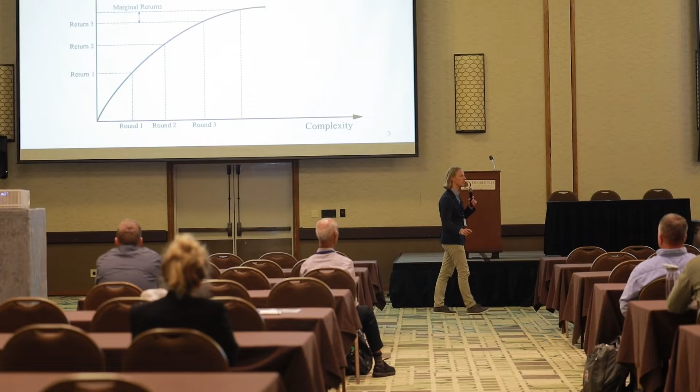Because I'm an engineer, that's just the way it works. And this one is a figure. I'll show you the figure from a book that I read more than 10 years ago now. It was written in 1988 called The Collapse of Complex Societies by Joseph Tainter. He used a very well-known economics model called diminishing marginal returns, and he associated that with civilization.

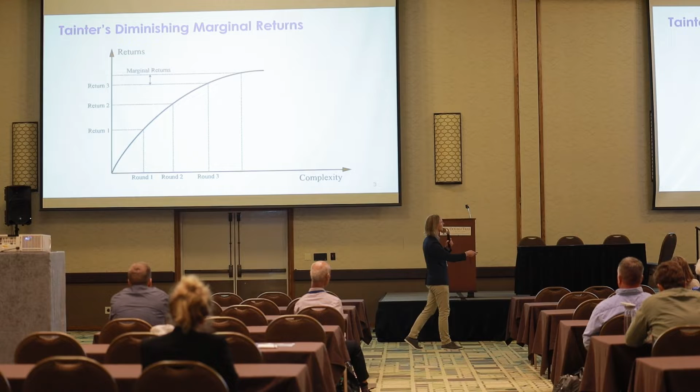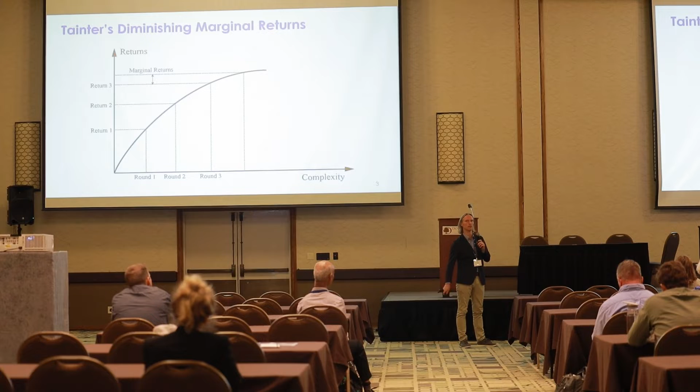So let's see if, all right, perfect. So that laser pointer works. So I want to explain to you what that is. It says complexity and returns. Don't really read complexity, I just really want you to think in terms of infrastructure. So what we're going to do here is on the x-axis, we're going to add infrastructure. And on the y-axis, we're going to look at the benefits from that infrastructure.

So for example, let's say you're in Omaha or you're in Lincoln, you're the first settlers there, and you need to get your water from somewhere. Where are you going to get it from? If you're in Omaha, for example, it might be some well field, or it might be from the Missouri River, and then you'll add a lot of infrastructure right here, and you'll get tons of benefits from it, right? You're going to go first with the lowest cost, most accessible option, the easiest, so you're going to get tons of benefits from it.

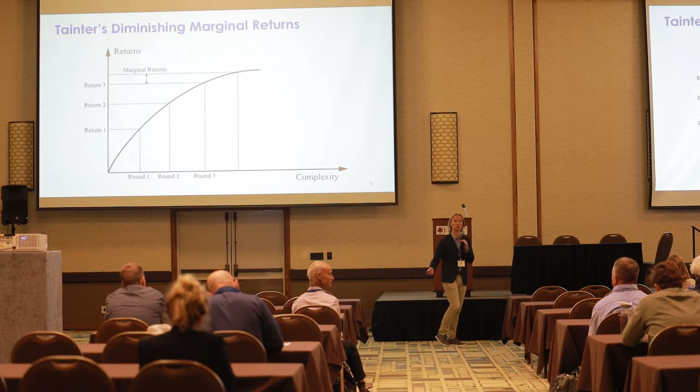And then your city grows, and that one source is not enough anymore, so you need to build more, kind of what's happening exactly with Lincoln. And so you're going to have to add more things, and maybe you're going to have to double your system. It's inevitably going to have to become more complex, but the returns are going to have to be smaller because the best option, you already tapped it, so you're going to have to go to the second best option. And if it grows again, you have to add way more, but the benefits, even for every gallon of water that you're using, are getting smaller.

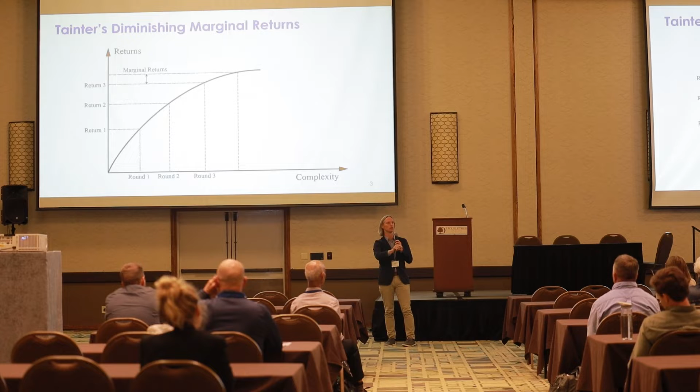If you keep doing that, they get smaller and smaller and smaller. So the fact that the benefits get smaller, those added benefits, these are marginal returns, the new returns that we get. And the fact that they're getting smaller and smaller means that they're diminishing, so diminishing marginal returns. My argument is that for a lot of the infrastructure right now, we're right there, at the end. And there's two options: either you change, you adapt, you evolve, you think differently, or you collapse.

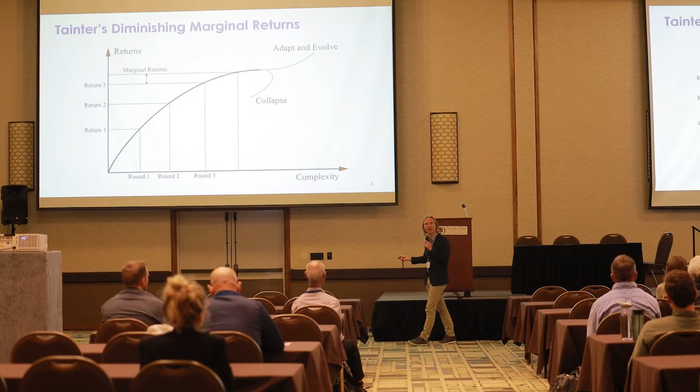And that's happened both in history of mankind. The Roman Empire is a great example of collapse. The Maya civilization is a great example of collapse. I want to come back. And here, adapt and evolve. Even the Industrial Revolution is a great example of adapt and evolve. Cities got bigger, we had access to coal.

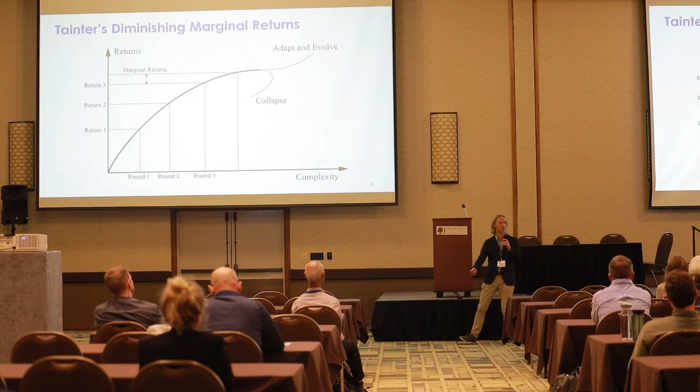We had access to fossil fuels, and we loved it. Now we understand that it was not necessarily the best thing in the world, and maybe we have to stop using a lot of that coal and fossil fuel.

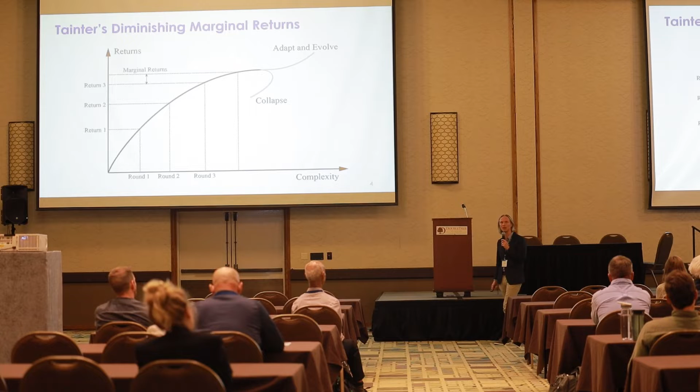That industrial revolution got us to go up, and now we're here again. So it's time to think differently. One of the ways I like to talk about those marginal returns is efficiency. Whenever we're trying to be more efficient, we're trying to do the same thing a bit better. That's okay when your system is not too big, that's okay at the very beginning.

A good example I have for you is the road system. At first you put a few roads, it's enough, it's good. Then you have more and more people coming in, and you start to think congestion is not very fluid. What do you do? You try to make the system more efficient. You put traffic signals, and then you have traffic signals everywhere, and it's a lot more efficient. And then you're like in LA, where you have as many roads as you can build, you have one of the best traffic signal systems in the world, and you have gridlock.

So what's the solution? More roads? Nah. Better traffic system? Nah. You have to change the way you think about things. It's not about being more efficient, it's about being more effective. Completely changing the way you do things, trying to be a lot more innovative. And that's where we are with a lot of infrastructure systems right now.

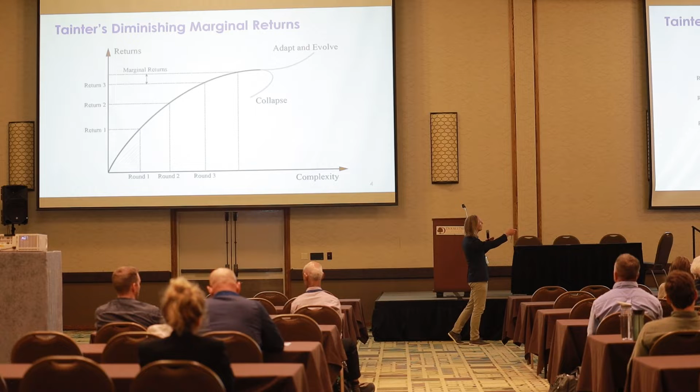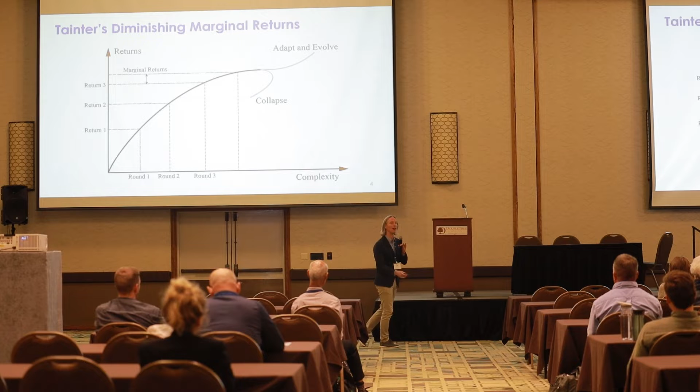I'll point to one, at least in water, and see if you agree with me. It's one where I think the water realm is really behind other infrastructure systems. So we'll try to think about that together.

What we'll try to do today is really also to think differently. There's that quote from Einstein that I love: we can't solve our problems with the same thinking we used when we created them. As an engineer, I know that we've developed a lot of methods in the 1960s and 70s, and a lot of them kind of drove us to the problems that we have now. So they solved the problem at the time, and they were amazing.

But if we keep using the same concepts now, we're not going to solve anything because they're the ones that drove us there. A good example, again in transportation, is traffic flow theory. It was developed starting in the 1930s and 40s, and it was amazing, it's great. We have all those roads now, but if you use traffic flow theory to solve your problems, it's not going to work because that's what drove us there.

Another good example I have for you is I remember Mark Zuckerberg, the CEO of Facebook, testifying in front of Congress and talking about Facebook and the problem with a lot of the algorithms, all the machine learning that feeds you advertising or posts on Facebook, and how those are reinforced by what you see, so you kind of get into that mindset, into that rabbit hole.

And they were saying, well, maybe what we can do is have new machine learning to judge the current machine learning. It's like, that doesn't make sense. Those were great at the beginning, they got you to the system that you have, but you can't solve your problem by using the same thing that created your problem. Right? So we'll try to think about that.

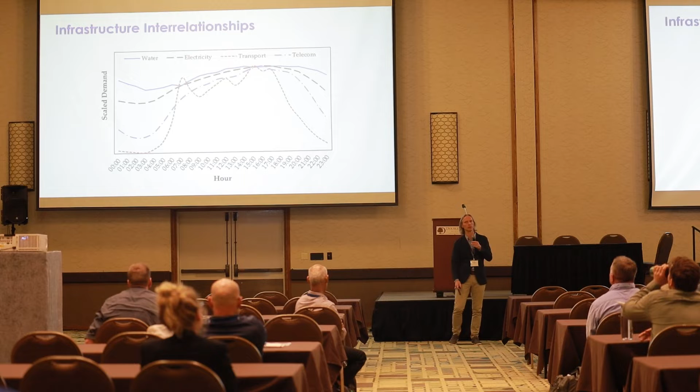I mean, this is all interrelated, all interrelated. I have a paper that came out not too long ago where we use transportation volume, traffic volume to predict electricity consumption. We did that with electricity because we had data, but I swear the same result would come in with water if we had smart meter data from water, right? It's all interrelated. So trying to think more about those interrelations, and we'll talk a little bit more also about multifunctional infrastructure.

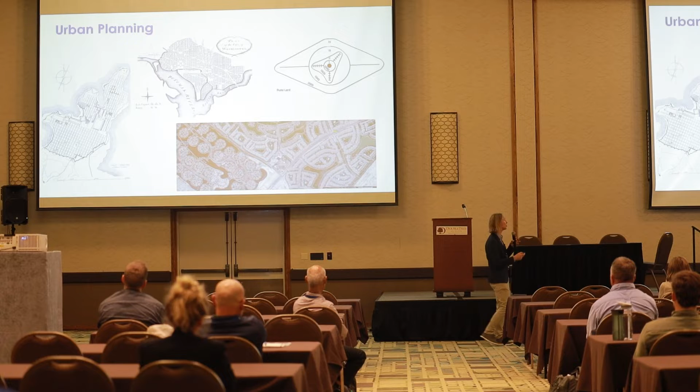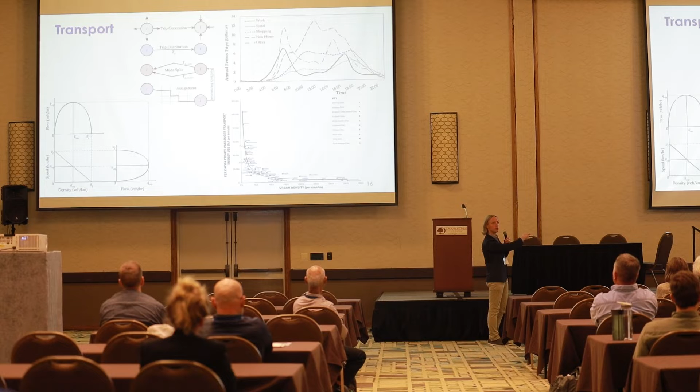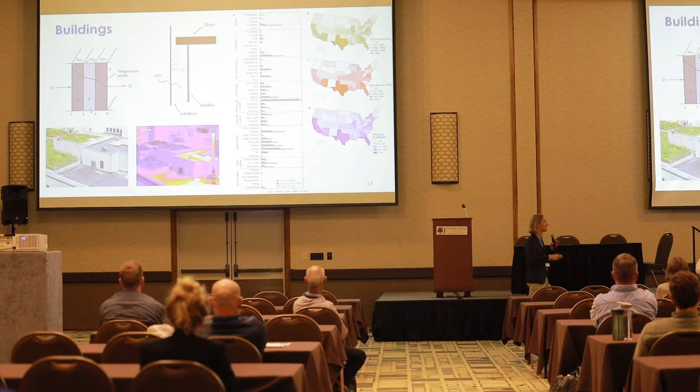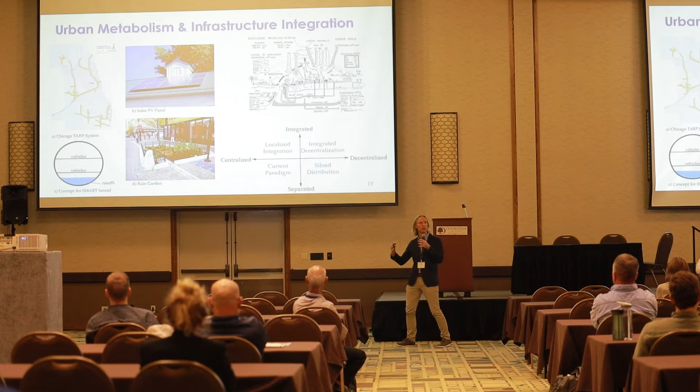So there's your fundamental flow of traffic. For those of you who did an undergraduate degree in civil engineering, here's the 4-step model. Buildings and your heat transfer, and that's Fourier's laws of heat transfer, exactly the same as Darcy's law, exactly the same. Even some of the variables are the same symbol. Solid waste, fascinating world, solid waste. Urban metabolism is kind of the thing that puts it all together. Urban metabolism is when you look at the flow of energy, resources, water, everything within a city.

And I'll talk more about some of these things. Then I'm really thinking about how do you think different, right? We can't solve our problems by using the same thinking we used when we created them, which means we have to think differently. For that, I've really learned a lot about the science of cities, about network science. And I do a lot of machine learning and data science, a lot of it. And I find it fascinating.

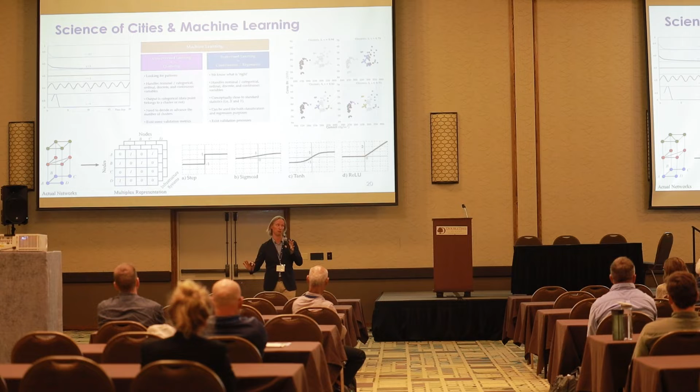And by the way, the computer science industry, they're absolutely amazing in marketing. The first time I heard about a random forest, it's like, wow, a random forest. But it's not that hard. You can all learn what the random forest algorithm does. It's really not that complicated, but it's very intimidating, let me tell you. When you hear about support vector machine and random forest, at some point they throw the term deep learning. It's like, oh, what's deep learning? It's all accessible. You should all know kind of how it works. You can all do it, I swear. And I did it. And if I did, everyone can.

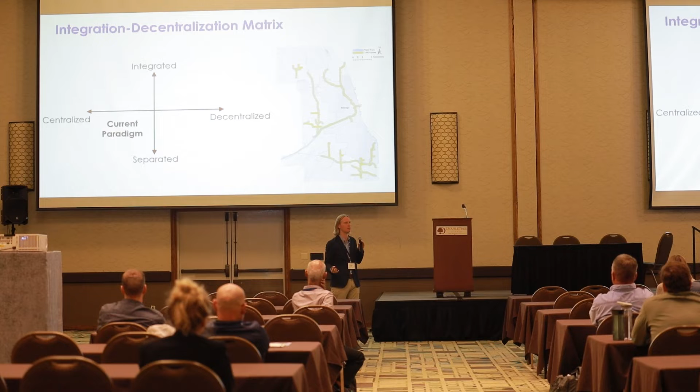But this is the TARP system—really over-engineered, completely separated. It's all below the rivers. One reason it's below the rivers is because the Department of Water Management owns the waterway. Maybe they could have put it below the interstate highway systems, for example, but that would mean they'd have to work with the Department of Transportation. Nah, we don't want to work with anyone else. We want to keep it just for ourselves. So that's the current paradigm.

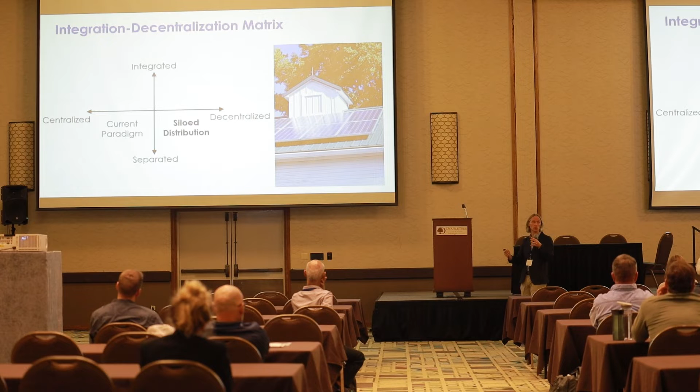Now, part of it we're trying to be a bit more decentralized, but still very much separated. A good example for that are solar panels. Everyone can have a solar panel, very, very distributed, as opposed to those massive thermal power plants like hydroelectric, nuclear, or coal. But still very separated, just decentralized. That's one where we're going.

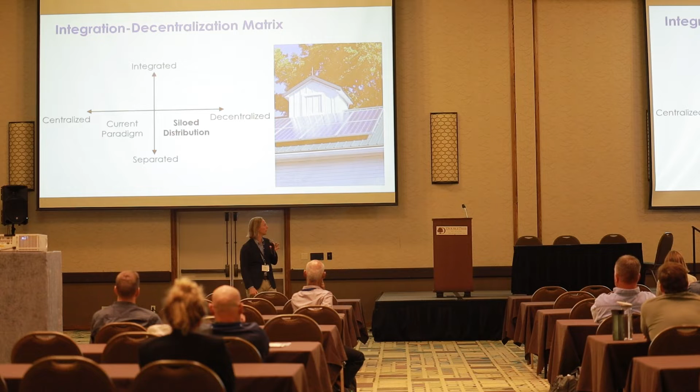Another one: we have a few examples of localized integration. That's when you're still very much centralized, but at least you're starting to integrate a little bit. The example here is Kuala Lumpur, the capital of Malaysia. It's in a tropical climate, it rains a lot, so they have to deal with very intense flooding. At the same time, Kuala Lumpur has a big traffic problem, and it doesn't rain all the time, but they have a traffic problem.

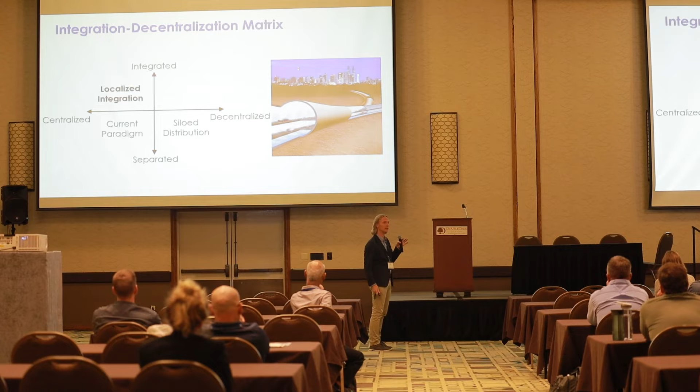So what they did is build a tunnel that you have traffic in, and whenever it rains too much, they close it to traffic and flood the entire tunnel. Many cities have those tunnels, by the way, and they don't do that—you might have some stormwater management at the bottom, but they don't. In Kuala Lumpur, they did. So, some integration—I sort of don't like that example, but you have some integration.

Another one—I'm going to show you the picture after because I want to make you think about it—is now we're going to go to India. India has 1.5 billion people, and 1.5 billion people need to eat, so you need to provide that food somehow. Agriculture is huge in India. It's also a very hot place with some water, but you have to irrigate, you have to transport a lot of that water to places just to grow all these crops. That means they have a lot of canals just about everywhere.

But at the same time, it's really, really hot, so they had a huge problem with evaporation. What do you do? You have a canal that's exposed to the air, evaporation is a huge problem, you want to maintain as much water as you can. What do you do? Ask an engineer of the 1960s or 70s, they'd tell you the problem is evaporation—you cover it, otherwise you put it underground. That's what you do, it just makes sense, right?

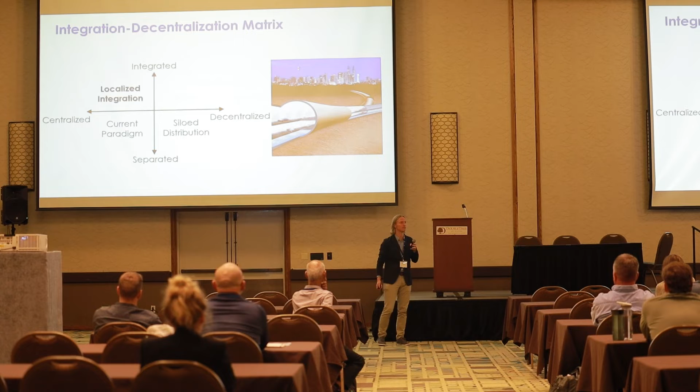And a 21st century engineer is going to tell you, what else can you do with it? Why don't you put solar panels on it? That's going to provide the shade, and now your temperature is going to be a lot lower, so it's not going to evaporate nearly as much. At the same time, that cooler water underneath is actually better for the solar panel, so the solar panel is a lot more efficient. Stupid example—it's kind of obvious when you look at it, but before you'd just think, well, you just cover it, you know?

When you start to think about those multiple infrastructures and how they integrate, and when you think about multifunctional infrastructure, then you see that they make a lot more sense. One thing I like to say is that now all that infrastructure is absolutely interdependent, but not by design.

It's just because we want it to be more efficient. One example is telecom. All infrastructure systems are absolutely vulnerable to any damage in the telecom industry. This morning we were talking about the SCADA system - you put it in because it makes you a lot more efficient.

It's great, absolutely, but now you're also building a vulnerability over that telecom. Is the solution not to use telecom? Absolutely not. You want to use telecom, but use it in a way that makes your whole system more resilient. So when things are interdependent by design, those interdependencies, instead of being vulnerabilities, tend to be enabling factors because both your systems work much better.

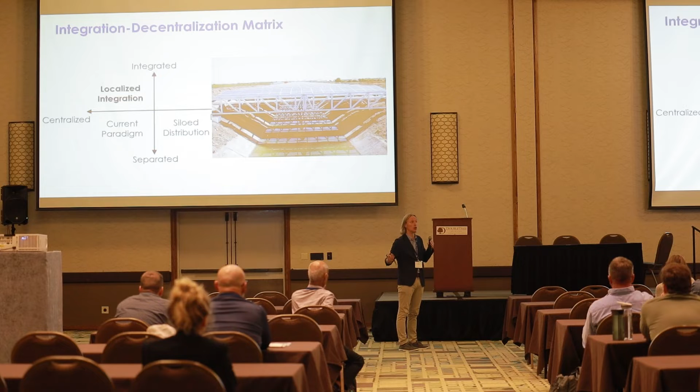I might have some of this wrong, but think about what you're doing in your institutions, think about those interdependencies, how they could be more resilient, and think about new projects, including that new pipe you're going to get from the Missouri River all the way to Lincoln. Is there anything else you could do with it to provide a better service for something else?

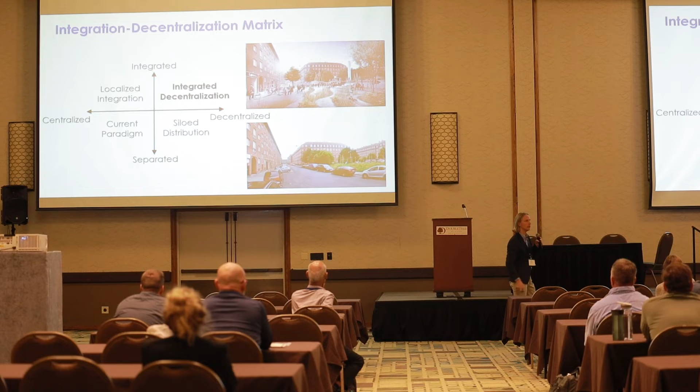The last one is integrated decentralization, which doesn't work everywhere, but I'm an absolute fanatic about green infrastructure. It's changing cities everywhere in the world. For example, in Copenhagen, where they want to become a climate-ready city, they turned an entire neighborhood - this street here - from a very traditional street with grass that does nothing for flooding, into a climate-ready, cloud-burst street with much better stormwater management and some green infrastructure. So that street is now both for traffic and for water.

So you just start to think differently. Green infrastructure is a good example because you can really do it on every single street, in every single city. Not everything has to be integrated and decentralized, not absolutely everything, but you think about it - just try to push away from the current paradigm. I even encourage you to do that for Lincoln. Maybe there's nothing to be done, maybe not, but maybe there is. Maybe you can integrate, maybe you can try to be multifunctional.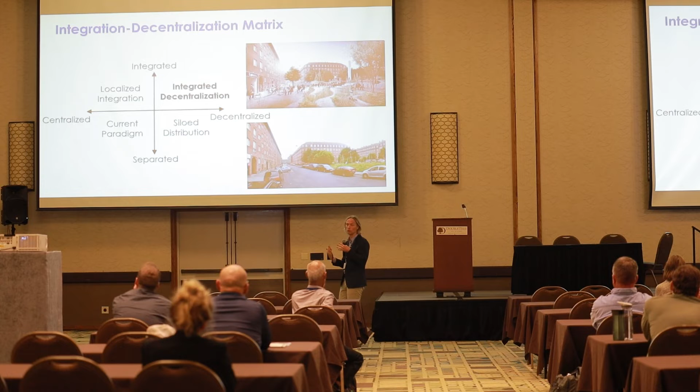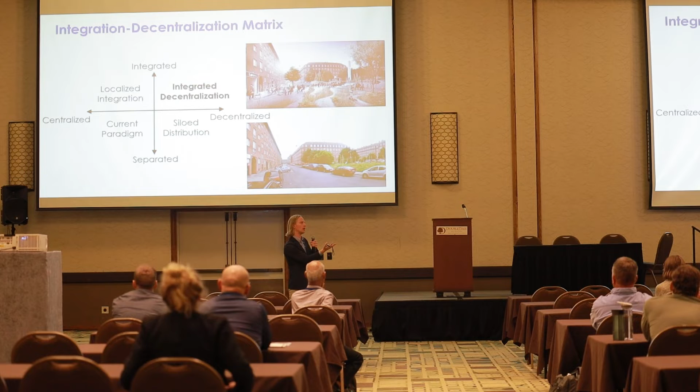One of my big pushes for multifunctionality is that now an asset isn't owned by one agency, but by two, which means you get resources and money from two agencies. So the value of the asset goes up and you have more support for it. Now I want to focus more on water and wastewater since this is a water conference. I was trying to think about water and wastewater and what's working well, what's not, and we'll start with water.

The three big elements are collection, treatment, and distribution. For collection, one source is surface water - this is in Chicago, a crib that's been there for more than 100 years, about 2 miles into the lake. There's an underground tunnel that brings it to the Jardine treatment plant, because you don't want to get the water that's really near the shore.

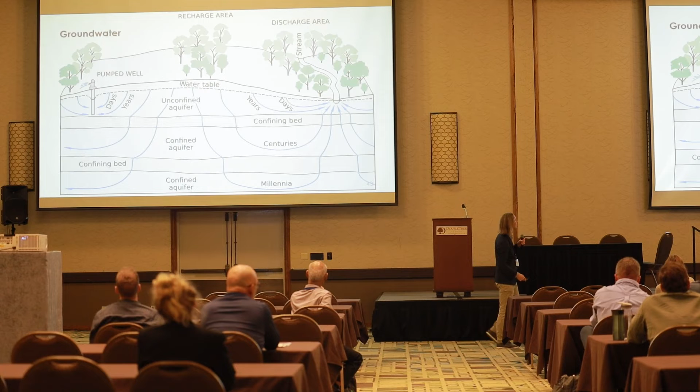We do have combined sewer overflow as well, so you get the water 2 miles into the lake - that's surface water. Here we have groundwater, which you know a lot about - sometimes you take the water from a well. I learned today here in Lincoln that you sometimes get it just under the river, when you have two sources. That's the way we do things.

Another source now is the sea - desalination is becoming bigger and bigger in places that don't have much water. Israel has one of the largest desalination plants in the world, and Saudi Arabia has similar ones. This one is in Singapore, except this is kind of a bad picture because this isn't seawater, it's fresh water - I told that to some folks this morning.

See, all that land here did not exist 30 years ago. A fifth of Singapore is reclaimed land. They just got a lot of rocks from Indonesia and infilled the water just by Singapore, and they created that horseshoe pattern.

And this all here, that is fresh water. There's a dam right here. And that's the Marina Bay Sands with an amazing swimming pool. Go to Singapore, it's an amazing place, but this is all fresh water.

One of the reasons why they wanted to do that is Singapore is very small. They don't have many resources, not many natural resources. They import a lot of water from Malaysia, and Malaysia likes to put pressure on them, like, oh, we're going to close that tap if you're not nice with us. So they need to build those reservoirs. That's one, and there's another one on the island as well.

In addition to a lot of measures they're doing, water consumption in Singapore is one of the lowest in the world, and they're also very big on water circularity. They treat the wastewater and send it to industries for industrial use, not for consumption, not clean enough, but about 25% of their water now is reused, and they're going to go up to 40%. This is the sea, and they do desalinate a lot of water as well, but this is actually fresh water.

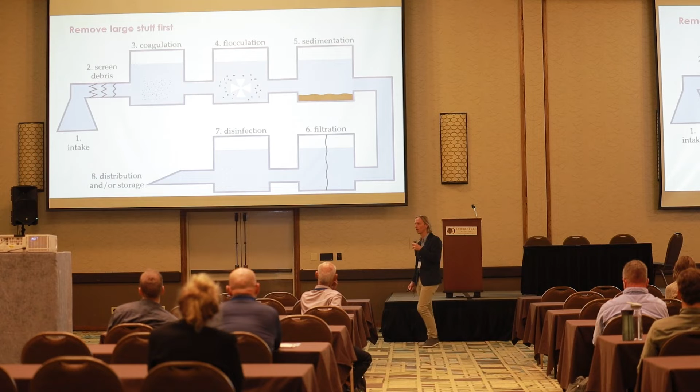I'm thinking about water treatment. I'm not an expert, but I really think the current process is pretty good and works pretty well. Desalination is different because it requires a lot of electricity, because you have to apply amazing pressure, 70 bar of pressure on that seawater to remove everything except for the H2O molecules. But otherwise, the current process works pretty well.

It reminds me of a documentary I watched on Netflix a few years ago, from Bill Gates. I forget if it's the first episode or not, but they went to an entrepreneur, an engineer, to try to provide clean water to some places. The engineer was saying, well, I was thinking about what I could do, and what I can do is boil it to make it clean. And in my mind, I was thinking, yeah, but that's stupid. It's not that you don't want to boil it, but boiling it means you need tons of energy to provide that heat to boil it.

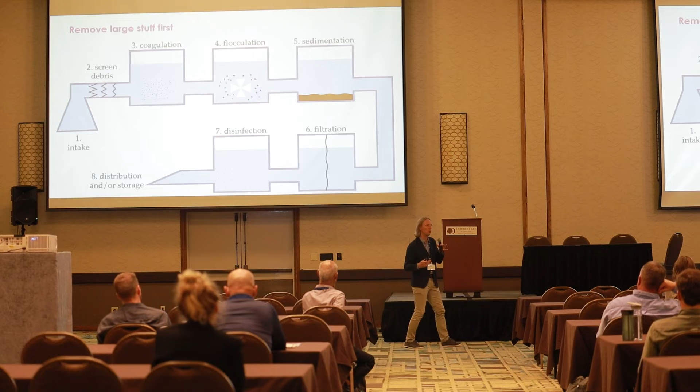There's a reason why we don't boil drinking water in water treatment plants. We try to do it in a way that requires a lot less energy. And in the end, what you're left with is water with all those minerals. So again, you might tell me no, the water treatment world completely has to change, but the way I think about it, it tends to work pretty well right now.

My beef is with water distribution. This is the way it works now: we have our treatment plant, we have our pipe, that distribution system and those pumps, and then they go to houses. And to me, right now, this makes no sense, because we have thousands of miles of pipes that are under constant pressure, always at 50 psi, 60 psi, 70 psi, for decades.

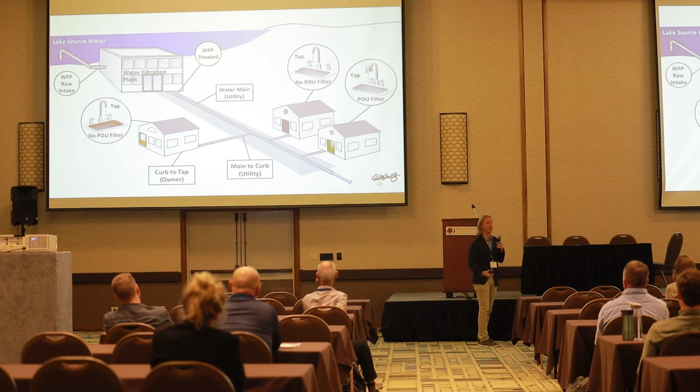It's a ticking time bomb. And then what happens? Water main break. We have to go emergency, close the valve, change it. People need their water, so we change it. And then it's constantly changing and changing, totally under pressure. That doesn't make sense. There's got to be a better way of doing it, right? This is a ticking time bomb. What's the solution? I have no idea. I don't know what the solution is.

All I know is that there's got to be a better solution than having those thousands of miles of pipes in the ground that stay there for decades or sometimes even more. They're constantly under pressure, right? There's got to be a better way.

Then in 2019, I went to Vietnam for a sabbatical, and I learned about how everything worked there. They told me about their water distribution system, and I felt so dumb. I was like, this is genius, this is amazing.

The way it works there is they had those neighborhoods in the city. They didn't have enough water distribution for everyone, so they would distribute to a neighborhood in the city, then stop in another neighborhood. But the people need water all the time, so what they did was have basement tanks.

Before, the water pressure was not high enough, so we were not at 70 psi, maybe closer to 20 psi. They would have the basement tanks because there's always lower elevation, so they would always get water. So you have your basement tank there.

But then you also have power outages sometimes. So they have a rooftop tank, and what they do is, at least when electricity is cheap, pump water to the rooftop tank. Another thing is it also warms up a little bit, so you don't need as much energy for water heating.

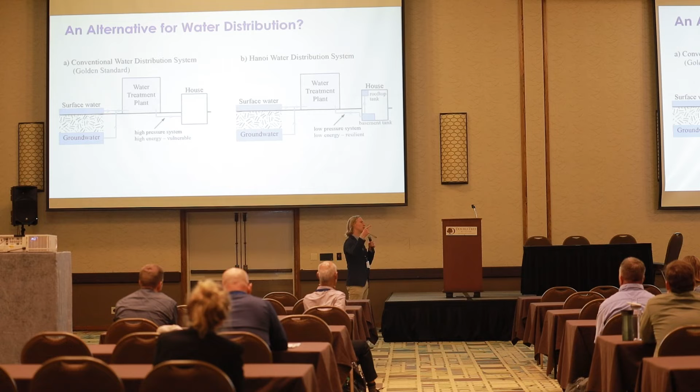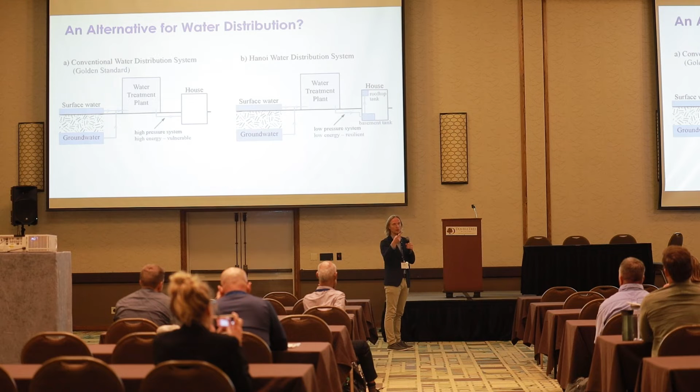The way we do it right now is we get that really cold water, around 50 degrees, from the pipe in the street, bring it to the water heater, and heat it up to maybe 90. But if it's on the rooftop at 70 degrees, we only need to bring it from 70 to 90. In a lot of places you see those rooftop tanks or solar water heaters, they're everywhere, just not here. So we do need to change something here.

Now let's move to wastewater. There's two kinds: sanitary wastewater and stormwater, sewer. I'm not going to talk too much about wastewater treatment, I don't know enough about it, but it seems like one of those things where there is innovation moving in the right way, and I don't know if it's a big problem the way we're doing things now.

In terms of handling the sewer, sometimes we have a combined sewer system, like in Chicago. That's your typical example of an old city where you started to consume more water for drinking, showering, and cleaning, and had to dispose of it because cesspools were full. Where do you put it? There were already drains in the street for stormwater, so we just connected them, and that led to combined sewers.

Right now we're not building any combined sewers. Any city or neighborhood outside of the old areas being built is all separate. But some cities still have combined systems, and separating those is very difficult. That's the problem we have right now: stormwater goes straight to the sewer along with all the sanitary wastewater together. That's a big problem. I'll talk more about stormwater after.

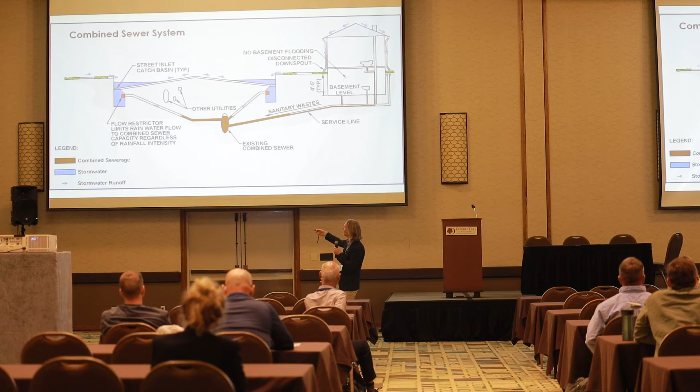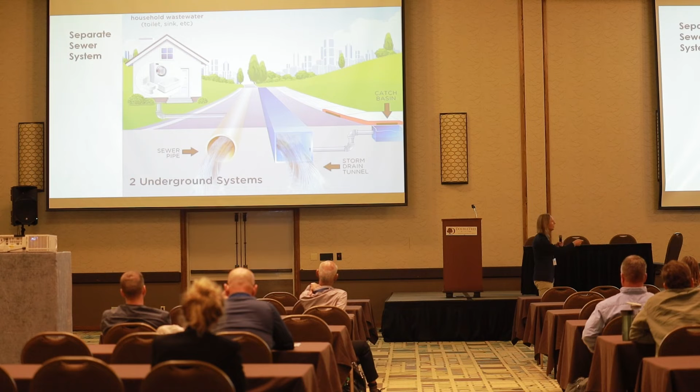This is your separate sewer system, which is happening in most places, and it's much, much better, because now your sewer pipe does not overflow. It goes to the wastewater treatment plant and gets treated. The stormwater is usually clean enough that you don't even need to treat it, and treating wastewater requires a tremendous amount of energy, so if you don't have to treat it, it's much easier.

That's back to the TARP system I talked about in Chicago before. You had your combined sewer system, and it would overflow to the river, and it still does now. What they wanted to do is build massive underground tunnels, absolutely massive, to capture some of that overflow, then bring it to an empty quarry outside the city. There are a few of them, including the McCook Reservoir, which you can see if you fly to Chicago.

And it stays there, and it absolutely stinks, and the residents hate it. But when it rains a lot, they have no choice. Then when it stops raining, they pump it to the wastewater treatment plant. This is, for me, a typical 1960s example of a solution. If I were an engineer in the 1960s, I would have probably done the same thing.

But I like to bring back the problem: the surfaces are impermeable, water has nowhere to go, so it goes to the sewers. Is the solution to bring that to an empty quarry, or to make the surfaces more permeable? The real solution is to make surfaces as permeable as possible. I'll talk more about green infrastructure, which isn't perfect, but it's better than this. I talk about this a lot in my class, because these are enormous, beautiful tunnels, miles of gorgeous tunnels that are purely there to store poop.

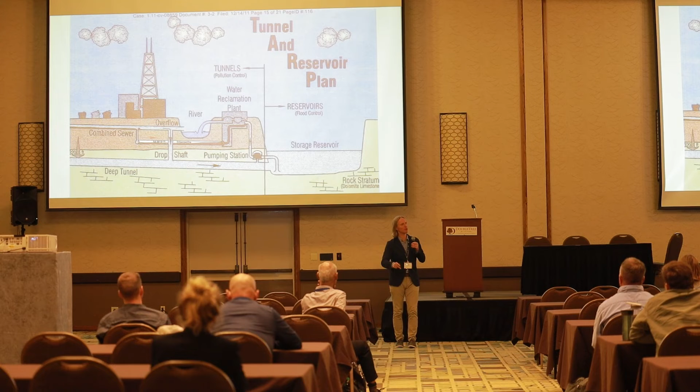It really bothers me because we have a crappy transit system in Chicago with a nice subway system. I wish the system could probably be doubled in size if we had built the same tunnels for people, instead of spending those billions of dollars for people, we spend it for poop. It's not entirely true, of course it's for people, but I just wish we had a better subway system in Chicago, because I think we'd do much better.

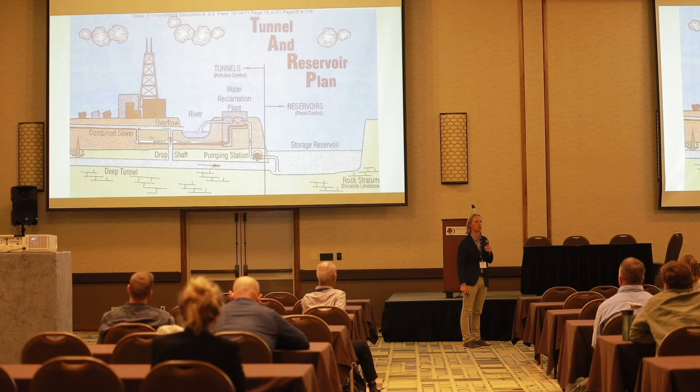And if it overflows, then it goes to the sewers. Maintaining those pavers is not easy. You do need to vacuum them every once in a while, and they do displace. Maintaining the planters is not easy either. It does require us to think differently, and requires some level of maintenance that traditional infrastructure does not require.

But we're smart people, and we learn, and we can make things better. What I'm told is that 15 years ago, when we talked about green infrastructure, people thought, that's very nice, but I have a limited budget, so I'll just go with what I know. 15 years after, it's the opposite - now we do a lot of green infrastructure. I know in Chicago, at least, they love green infrastructure. We're still figuring out some of the designs because sometimes your retention is not great, and it depends also on the freeze-thaw cycle in the winter, where we're still learning.

And really, to me, that's a much better example, because instead of putting all that stormwater and poop water in those huge tunnels, we just store them locally everywhere in the city, for some type of storm duration. At some point they overflow and go to the sewer, and at some point they might overflow as well, and then the city might still flood. It is an engineered project, but it just makes a lot of sense.

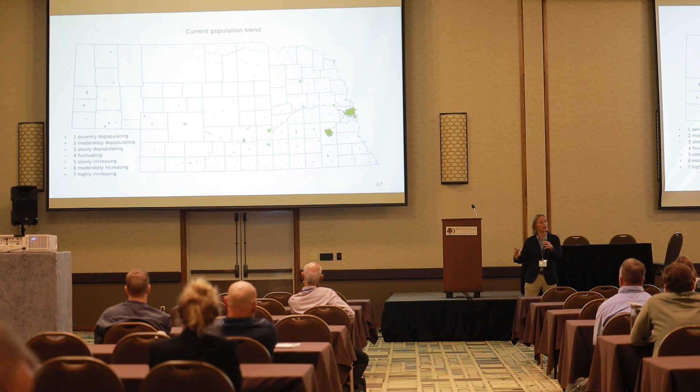So if a place is depopulating, that means you don't have enough resources, you don't have the same revenue to maintain your infrastructure, but it's there and it has to be maintained. Those roads have to be paved. But if you don't have the money, you can't do that.

Think about especially water, your water system. What if it goes down - right now those pipes are always under pressure, and you have someone living far away, so you can't just shut off the entire neighborhood. But with fewer people, the bills don't pay, and you can't even maintain everything.

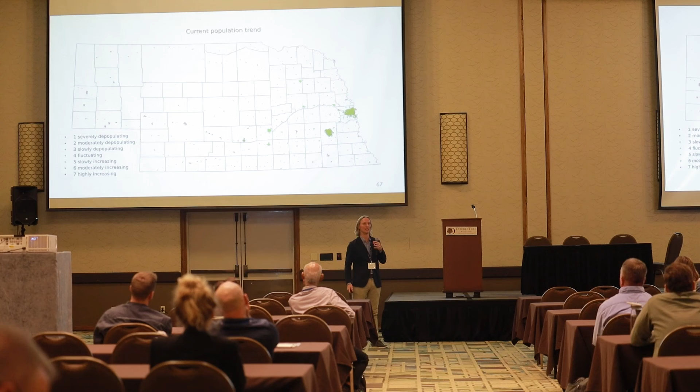So maybe what we should do is rethink the way we build infrastructure, moving away from growth-based planning to more managed planning, because many, many cities are depopulating in the US. We forecasted population in every single city in the US to 2100, and out of the roughly 30,000 cities in the US, about half of them are depopulating. Half. That's a lot. So we'll have to change the way we think about things.

And even Lincoln is increasing in population. I would invite you to think about being more modular, because right now it's increasing and might increase for the foreseeable future, but at some point it's probably going to shrink. And so all that asset you're building now that's providing for people will become a liability. There's just a shift - that's a cultural shift in the engineering community to think a little differently about how we do things.

And that's basically what I wanted to do today. So that's all I have for you.

I'll watch you do your work, and I'll see whether this is really your problem or not. So try to really go to the root of the problem.

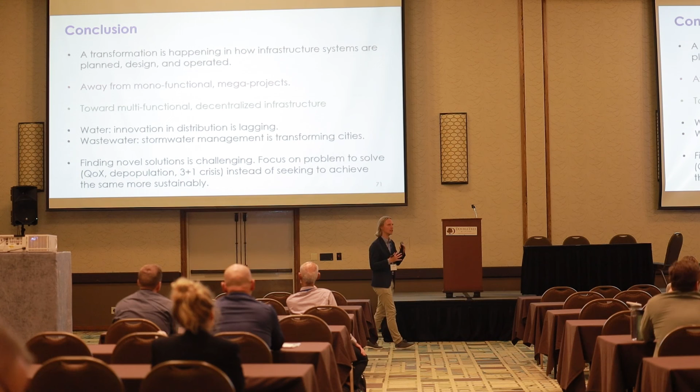So conclusion, basically, transformation is happening. I think water is a little bit behind. Water distribution is lagging a little bit. But we're trying to move away from monofunctional mega projects toward multifunctional, decentralized infrastructure. And then we just have to think a little bit differently about what we do to try to address some of those problems. That's all I have for you. Thank you very much.

And I went over a little bit. I'm sorry. Well, I have a few minutes. We do have some time for some questions.

100%. So absolutely, we'll have to change things. I don't think it's about being more risky, but I do think it's about being better conscious of what people actually want. As far as I know, engineers don't talk to people much. I was telling someone this morning, I love talking with high school students. They're full of energy, full of hope, they want to change the world. I hate talking to senior undergraduate students. They're robots, they apply equations. They don't think, and they only think technical. They don't really think about the implication of what they do to society.